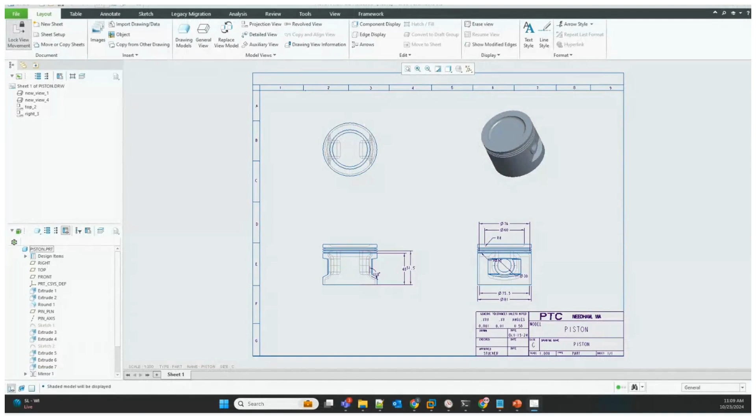I'll start with this drawing right here. This is the piston that we have, and we want to make a design change to it. I'll come into the part itself, and currently there are 3 grooves in here. I'm going to go ahead and make those 5 or so, so we'll make the design change.

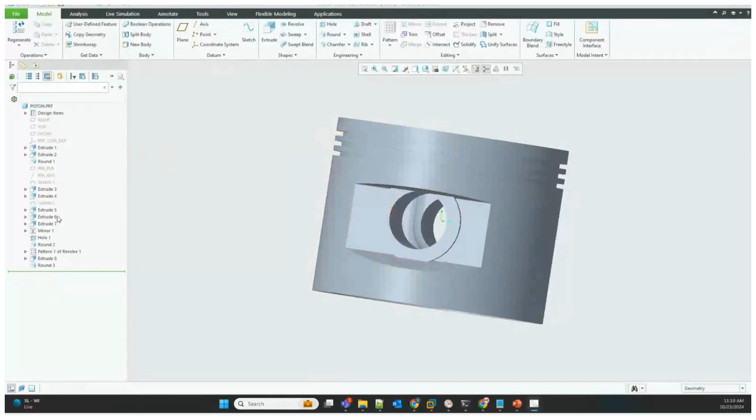Now, by the way, this particular piston is already released. So if I jump into my workspace here, you can see that piston is already released. I'll be doing a typical engineering task where I revise the piston, modify the model, and then eventually get it back to released again by doing a promotion request.

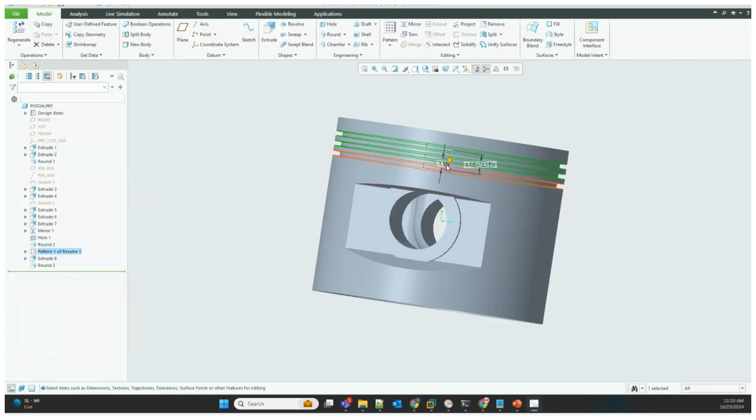So in this case, let's quickly modify the spacing here and say we want that to be 5 instances. You'll notice the model has changed, and now we have 5 instances of the grooves in here.

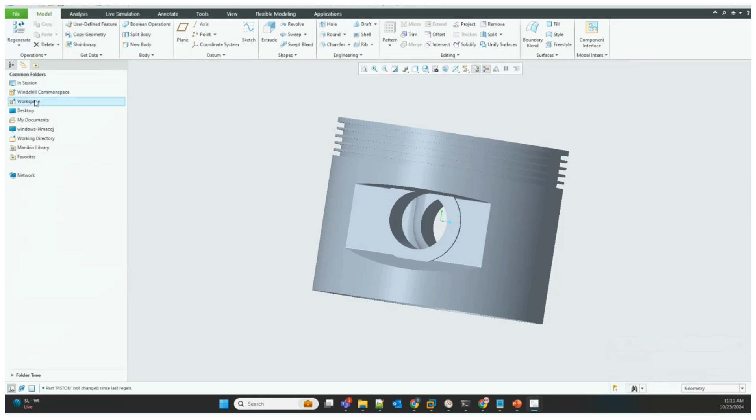Now we'll go ahead and revise this and then check it back in. So let's go to my workspace real quick, select those items, and revise them. We only want those 2 required items. Okay, so revised, and now we'll go ahead and check them out.

And I'll go to my drawing and save them, so the copy over here in the workspace should be updated with the newest revision. Yep, so the local copy is now updated. I'll go ahead and check these back into Windchill.

All right, wonderful, now they're checked in, they're still in work. Normally there'll be a promotion request approval process where the parts go through several approvers in order to eventually be released. But in the interest of time, in a quick webinar series here, I'm going to switch to a different profile.

There's already, in this case, I'm no longer a designer. In this particular Windchill profile, I'm now an admin, and I can go in here and set state for these particular items to go from in work, with the new revision D2, over to release. So go ahead and pick those items, say set state, and let's go release them.

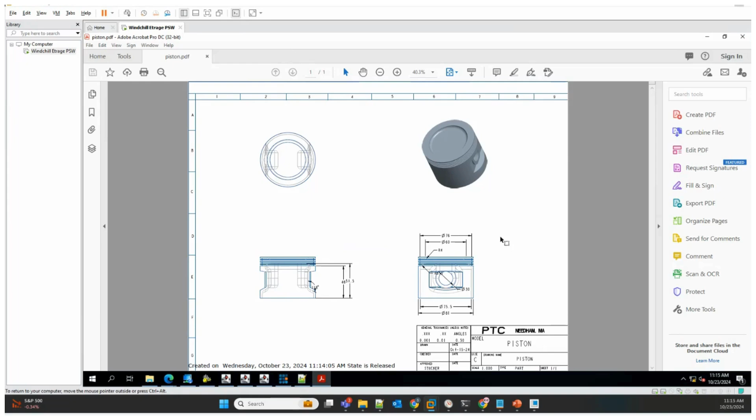And again, I can open that PDF and take a look and see. In this case, now there are 5 ridges across over here, right? And it was just created a minute ago. And so I'll close that PDF for now.

The other feature I'll highlight real quick, or I'll show, is the fact that we can also do this by user request as well. And so, for example, in this case, we already have 2 different drawings over here, the piston pin and the crankshaft. One is in work, the other is released.

And say again, I'm an engineer where we have either a request to send out some drawings to a supplier for quoting. I can go ahead and very easily say, hey, I want to export these object options, and say I want to export these as a PDF. Select them, and then go ahead and okay, and then that pushes that to the request processor.

Now it's going, and while it's cooking, I'll discuss the architecture a little bit here. So the publisher, it has a 2-layer architecture, which essentially means that we have a part of it that's installed on Windchill itself. It's a very light application that's installed on Windchill, and that's why you're able to see the ETRAGE Publisher with the Windchill interface.

And also that's why you're able to use the requested actions over here, this export object options menu. This is an ETRAGE essentially plugin that layers into Windchill. So that's the Windchill part of it.

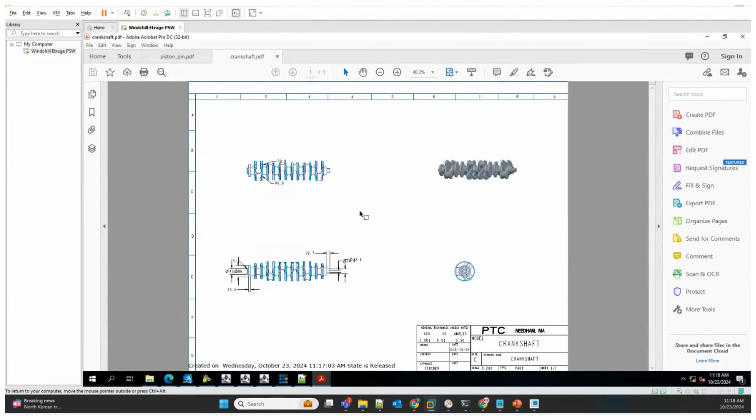And can export to many different repositories or areas, even concurrently. So we could export these to the same folder on a particular machine, or we can export these to a network drive, like I mentioned, or we can publish these to SharePoint, or we even have our own custom proprietary viewer, which we call the ETRAGE viewer, that we can publish that to, and we can have many departments consume information from the ETRAGE viewer as well. And so there's almost an unlimited number of ways we can export this information.

In this particular example for the webinar, we're opening these up from a folder. You'll notice the crankshaft over here. When we export that, we can also add additional plugins, like in this case, a watermark. So we watermarked this PDF when it was created, along with the lifecycle state inside of PLM.

In this case, the crankshaft is released, and the piston pin is in work. This means you can publish and send out jobs from PLM to other departments without fear of something that may be in work being used for production, because you can clearly indicate the particular status or lifecycle of that object.

Now, this watermarking is done outside of Windchill, and as you can see here, the watermark stays on the document completely outside of Windchill. So I can take this PDF, email it out to a supplier, or they can log into our Etrage viewer and view it there, and they'll still see the same watermarking. So for the life of that document, they can see that information.

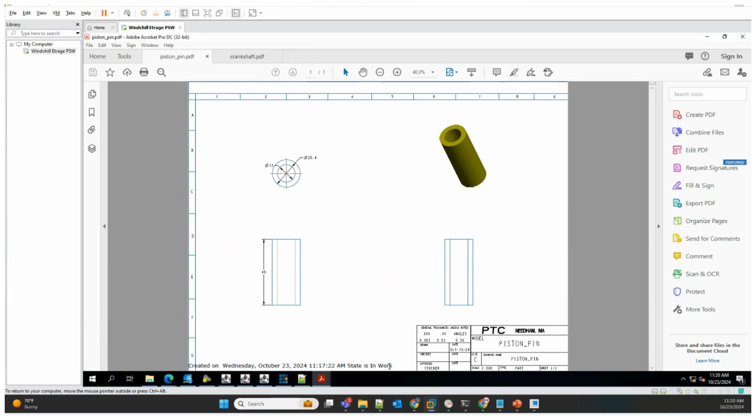In addition to the watermarking, I'll jump into the request processor here and show a few other items. First I'll go into the request processing options, and you'll notice, in this case for Creo, this shows all the different exporting file formats we can export in, for both drawings, assemblies, and parts as well.

Oftentimes the first thing customers look at is whether their file type is covered here, and 99 times out of 100, it is. If you have a particular file type you currently use to share data within your organization or externally, you likely have it covered. If not, you could reach out to us, and as long as it's part of the Creo and/or Windchill API, we can find a way to extract, present, and export that for you. Every file type you see in the UI has been requested at some point by a prior customer.

Our product is very highly configurable, and we want to make sure we use it to support your business processes. Almost no two installations of the Etrage Publisher are alike, because we always customize it to fit exactly your business process, to ensure that ultimately all the departments in your organization are successful in how you use the Etrage Publisher.

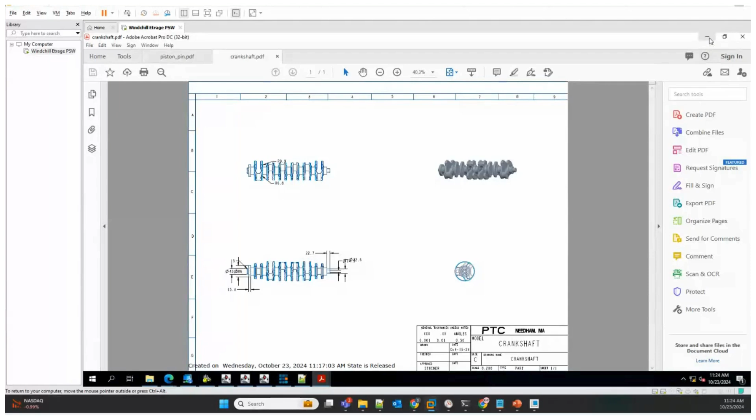So that goes over the Etrage request processor portion of things. And that, I would say, concludes our demonstration for the Etrage Publisher. At this point, I'll go ahead and switch back to the presentation.

All right, and so overall, the big thing when it comes to all of this is, the next question is oftentimes, well, why does this matter? That you could publish this information and share it across the entire organization. Well, it matters because if you are in quality, for example.

And this is a real example, where I played a part. I had a case where I had a quality technician doing a PPAP or an AS9102 first article inspection report for a single automotive component. By the way, we have a separate webinar where we discuss another Etrage product that can help with your PPAP or first article inspection report generation, but again, that's a separate topic.

In this particular case, this quality inspector needed to extract nominals from a 2D drawing that he needed to inspect, and because he did not have the CAD data, he was manually creating the nominals in his 3D metrology software. That process took probably 8 hours for him to complete that entire nominal input for just one part, because it's a PPAP, you're inspecting every single dimension. And in his case, he did not have CAD.